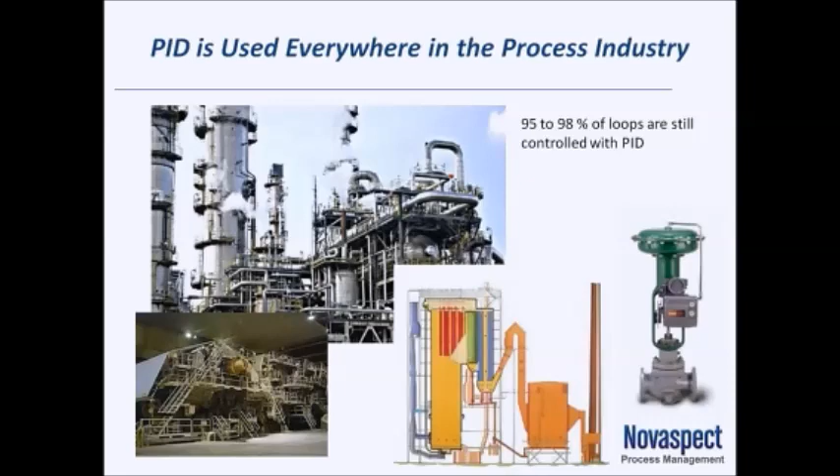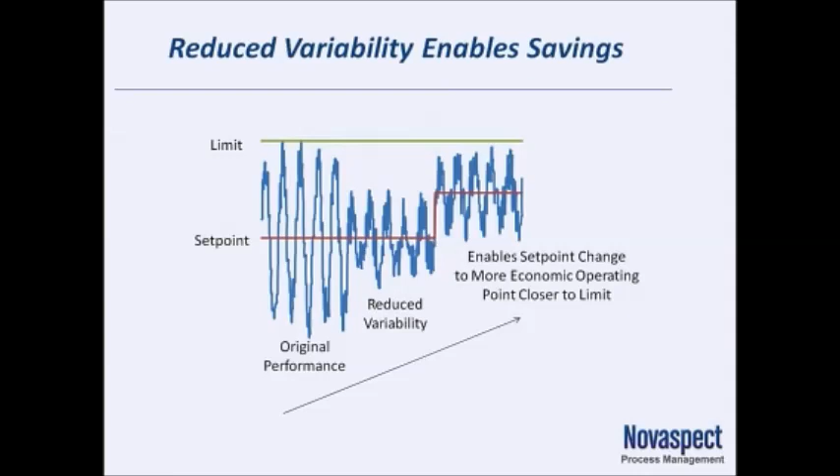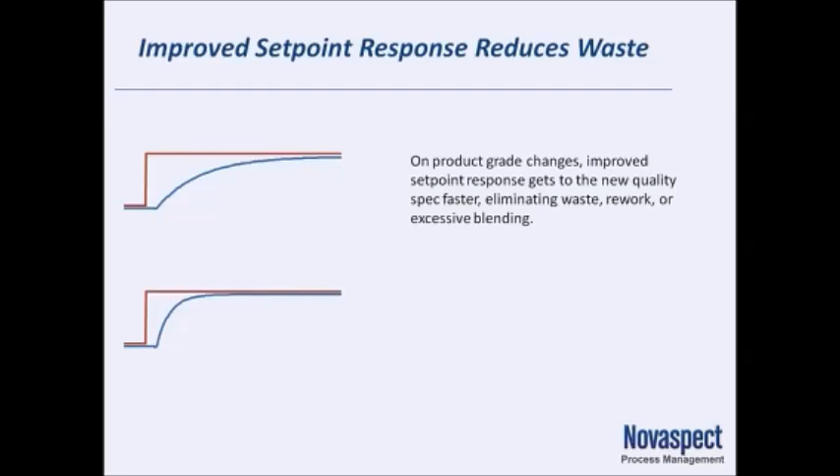Finally, perhaps the most important job of all for control loops is to respond to the unexpected or unmeasured. There are a lot of things that could change or go wrong in our plants. Most of them we don't anticipate. Many of them we don't even measure. The automatic controls are our first and best defense against those unplanned events.

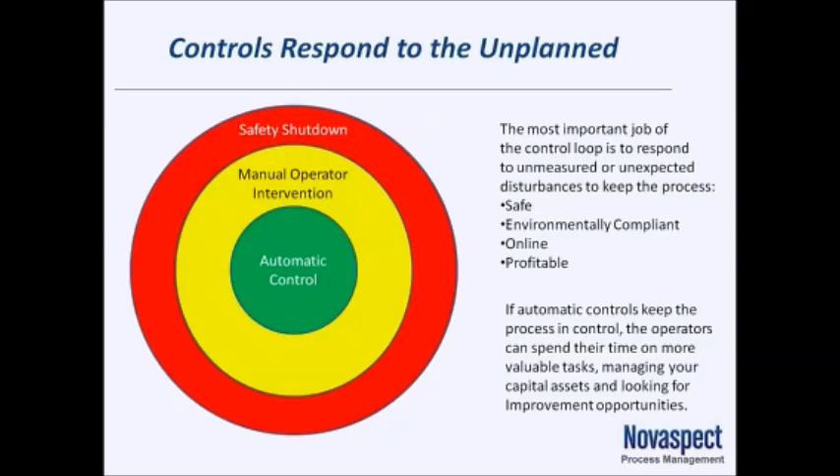So if the first layer of controls, our automatic controls, are effective, the operators can spend their time managing and optimizing your business rather than babysitting problem loops, and we stay online, safe, environmentally compliant, and profitable.

So the point of those previous three slides was to show that many of the outcomes of effective control translate into improved profitability. We stay safe, we comply with our regulatory requirements, we stay online more often, improved controls can reduce our maintenance cost and reduce our raw material costs. Best of all, it lets us make better product more often with less waste and less product giveaway. All of these improvements translate into dollars at the end of the day.

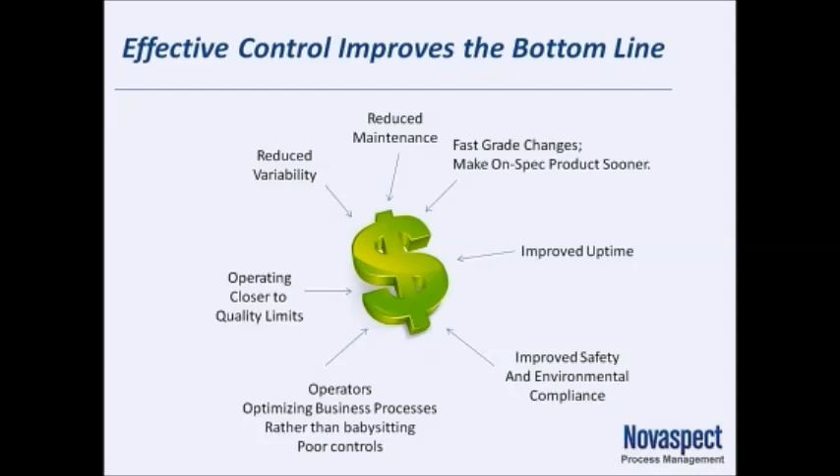But how well are we really doing? Those are our goals, that's what we're shooting for. As an industry, are we achieving those? Unfortunately, not very often.

There's a very often cited survey from EnTech from 1994. EnTech surveyed dozens of paper mills in Canada and found that of all the loops they analyzed, only 20% of them actually reduced variability. 80% of automatic control loops in our plants made problems worse rather than better. The EnTech team found that 30% of the loops were problematic due to valve problems - sticky valves, sloppy valves, valves that didn't go where the control system commanded them.

Another 30% of the loops actually made problems worse due to poor tuning. When there was variability or noise or disturbances in the process, these loops behaved worse in automatic control than they did in manual. Finally, the last 20% of the loops EnTech found were problematic due to a variety of configuration errors - that could have been measurement problems, improper scan rate, improper filtering, just configuration mistakes, or inappropriate control strategies.

There were other studies, and there continue to be other studies, that find similar results. Another 1993 study found that 30% of the loops they found in control rooms were left in manual, presumably because the operators felt more confident in manual than they did turning their loops over to automatic control. That same study found that 20% of the loops still used factory default tuning - in other words, they'd never been intentionally tuned before. Other studies more recently are finding similar results.

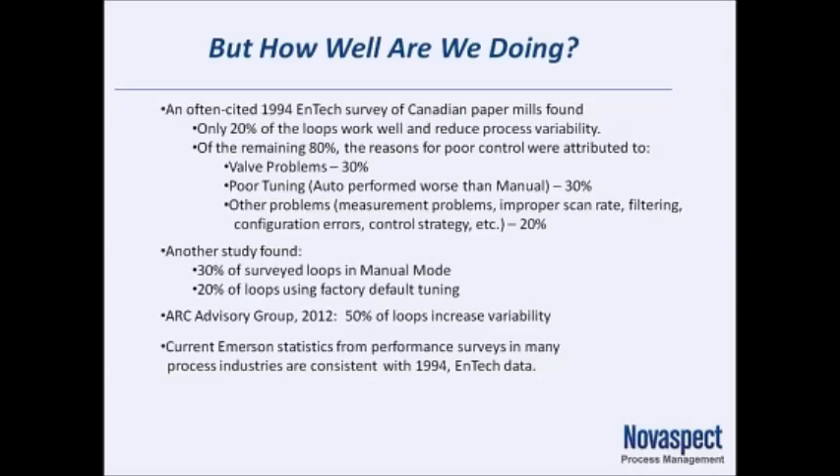So, I'm motivated to do better. I can see there's an opportunity. Where can I start? I started my search

So is there a simpler method? Yes, that's what I'd like to talk about today. The Lambda tuning method that I want to discuss gives us an opportunity to use one or two very simple rules. The method allows us to easily identify valve health.

If there's a mechanical problem, we recognize it early and have an opportunity to repair. The method results in predictable, stable behavior, smooth responses without overshoot. Most of all, I think the beauty of the Lambda method is it allows us to choose and prioritize our goals. We get to configure loops so they play nicely with others. That is, we can stop interactions by choosing which loops are most important to us, or we can choose to coordinate loops.

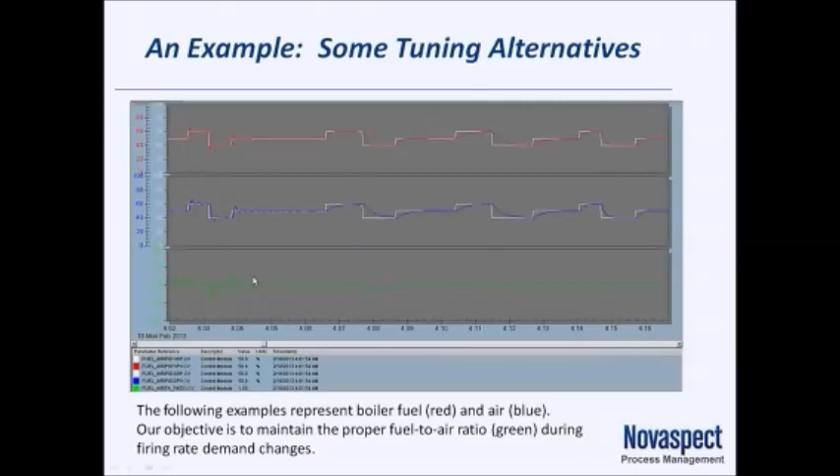First, let's look at some traditional techniques, including the one that's probably most familiar to many of us, the Ziegler-Nichols tuning rule.

A lot of people tune just by experience, by experimentation, or by feel. Some people can do well at this, a lot of us can't. Even when we do well, it's not repeatable and it's not teachable. It's hard to teach somebody that a gain of 0.6 just felt right to me for that loop. Even when we do it well for one loop, that method doesn't give us a clean way to coordinate loops to behave together to achieve any of our goals.

So, in the name of looking for a more objective standard, Ziegler-Nichols is the set of tuning rules that many of us fall back on - the set of tuning rules that many of us learned either in trade school or in engineering school.

Ziegler-Nichols was developed in the 1940s. It was first applied to actually aiming gun turrets on Navy ships, and its goal was simply to get to set point as fast as possible. So if you look at my trace here, when I changed my firing rate, fuel got to set point, or at least crossed over set point, within 2 seconds. Air got there in 3 seconds.

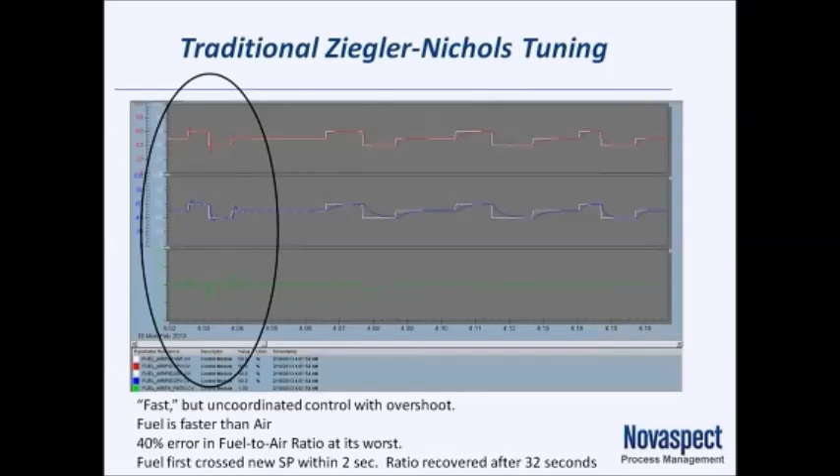We can do better. The next thing I want to discuss a little bit is an auto-tuner solution.

These are typical results from a modern control system auto-tuner. This is already worlds better. If your only other tool in your bag is Ziegler-Nichols, I'd highly recommend a much better alternative as an auto-tuner. You can see both fuel and air came to their new set point in a smooth fashion without overshoot. The problem is there's still not a convenient way to coordinate those two to play together, so we still had a 17% error right here in response to my load change. That's better than Ziegler-Nichols by a factor of 2, but we can do better.

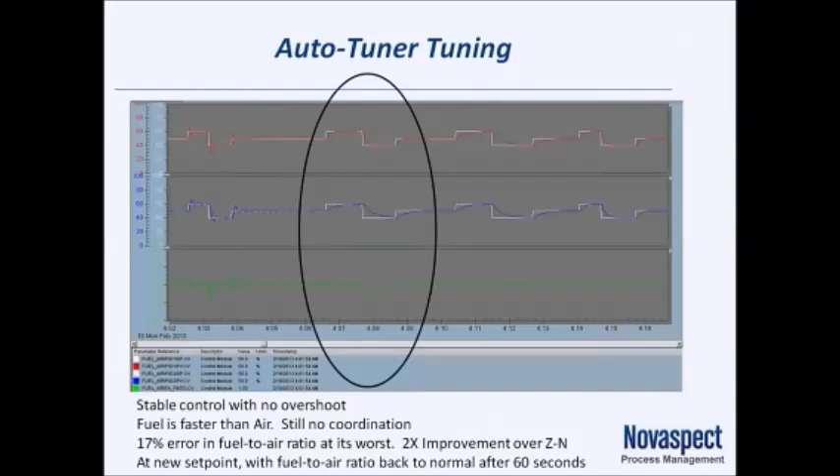Here I'm showing you for the first time today a conservatively tuned Lambda method tuning for fuel and air. The benefit of this method is I got to intentionally choose my response rate. Even though the dynamics of the two underlying loops are different - when I move a valve in manual, fuel gets to its new steady state faster than air does - in auto, I chose tuning so that fuel and air move together at the same rate as a coordinated pair. I came to set point 60 seconds after my change, but there was no error ever in fuel to air ratio. That is my important goal, and I was able to choose tuning constants that delivered.

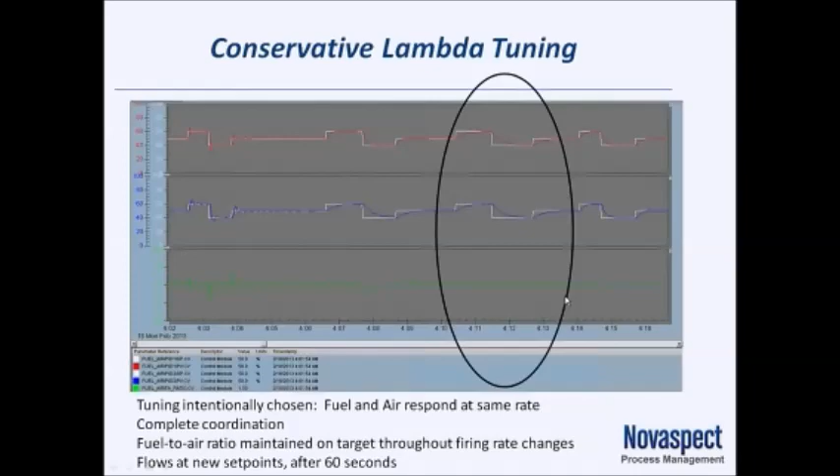Finally, my fourth example on this slide is another set of Lambda tuning, but this time I chose very fast, very aggressive tuning constants. What I want to show is that even though it's tuned fast, I still got stable control without overshoot. I actually got to target faster with Lambda tuning than I could with the so-called fast Ziegler-Nichols rules. With the aggressive tuning, I didn't see an error of any more than 2% in my fuel to air ratio, and I got to set point in 24 seconds.

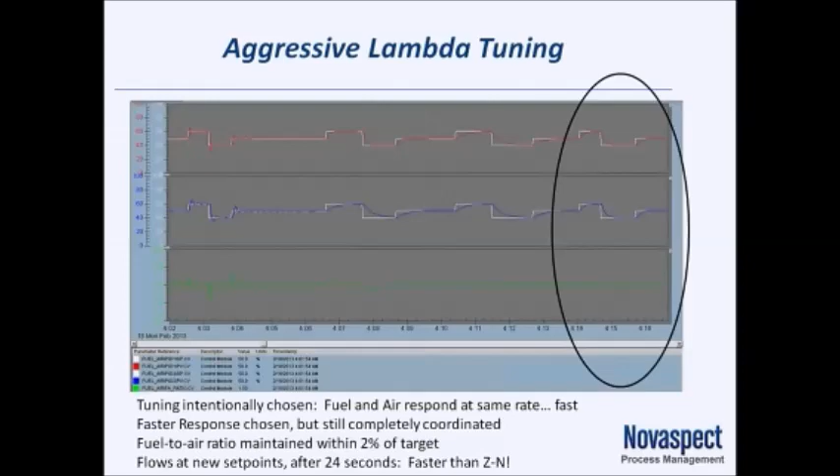So let's summarize some of the benefits that we just illustrated with those slides. I get to choose the response rates I want that meet my process needs. I don't just have to live with what my process or my valves give me.

Another benefit is I always have competing goals. I get to choose which of my goals are most important to me. In the previous example, maintaining the proper fuel to air ratio is much more important to me than simply saying I have fast control. I defined my goal and I achieved it.

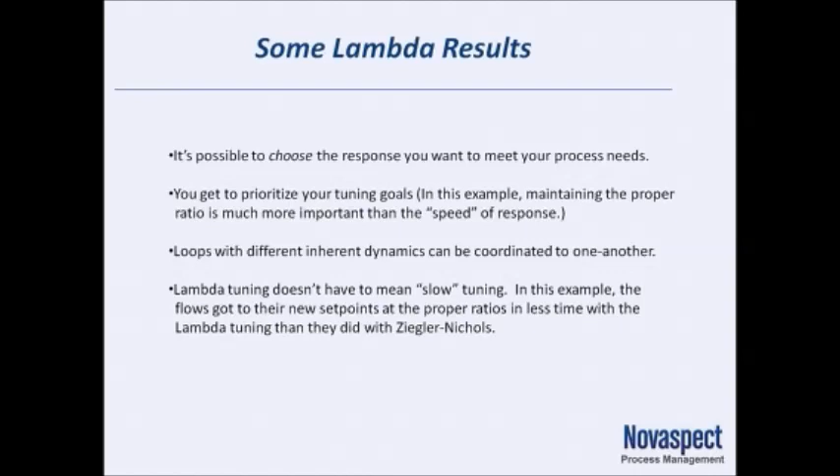The Lambda method gives us ways to coordinate loops that have inherently different dynamics. And the final slide was an example that Lambda tuning doesn't have to mean slow tuning. We got to set point with the proper ratios more quickly with the Lambda rules than we did with the standard old school fast rules.

These next couple slides are just a couple examples of real-world applications of Lambda tuning. The first one is a boiler steam drum. The top white straight line here is set point. We want the water level in the steam drum to be right in the middle of the drum. The yellow line is the actual drum level measurement. Red line is the steam flow, and the blue line in the bottom is the feed water.

Now, roughly speaking, what we're trying to do here is match the feed water flow in to the steam flow out. This light blue or cyan line is the valve position controlling the feed water, trying to achieve that goal. This was a steam drum, as found, tuned by others with fast, maybe not necessarily Ziegler-Nichols rules. This was just an attempt to tune the drum fast. At this instant, right here,

firing rate demand to this boiler picked up by 3%. And we saw the feed water overreact and underreact, overreact and underreact, to the point where it's actually affecting the steam flow out of this and affecting the other boilers that feed this same header. Probably the most important thing to look at here is that drum level is 4.5 inches above our target. At 5 inches above target, the safety system would shut this boiler off, and now it's not available to feed our plant anymore.

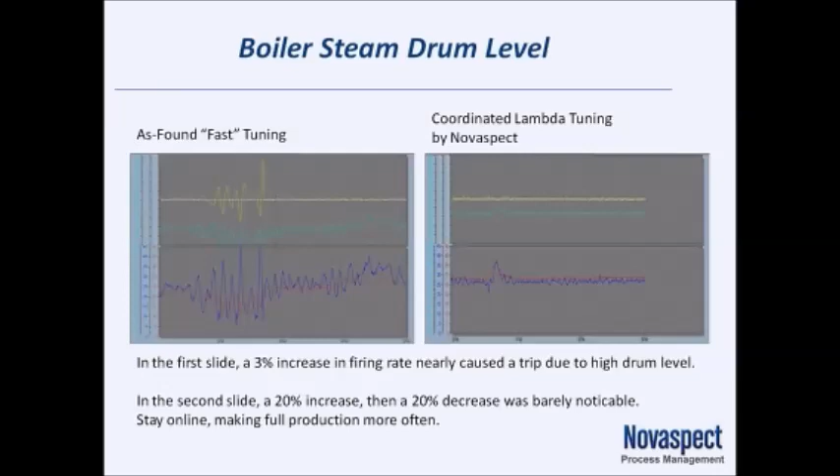This is another real-world example, a chemical manufacturer. This chemical reaction has two gaseous products, and there's a very expensive polymer membrane that separates the two. It's really important to maintain a near constant differential pressure across this membrane. As the differential pressure changes between the two product gases, it's flexing, fatiguing, and possibly even tearing this very expensive membrane.

My slide here is showing the before and after tuning. As found, this pressure between the two product gases was going up and down 1.5 inches higher or lower than set point. This was a simple preliminary tuning exercise that brought our control from plus or minus 1.5 inches to plus or minus 1/3 inch.

The bottom trace on each of these is another downstream user using one of these two product gases, and what I'm showing is that by fixing the problem at its source, we made control easier for the downstream user as well. Now, we came back to this customer site and took a broader look at the entire process and made some configuration changes in addition, which made this even better. Rather than showing you the final results, I wanted to show you these preliminary results, which were achieved with tuning only — just a handful of hours worth of work.

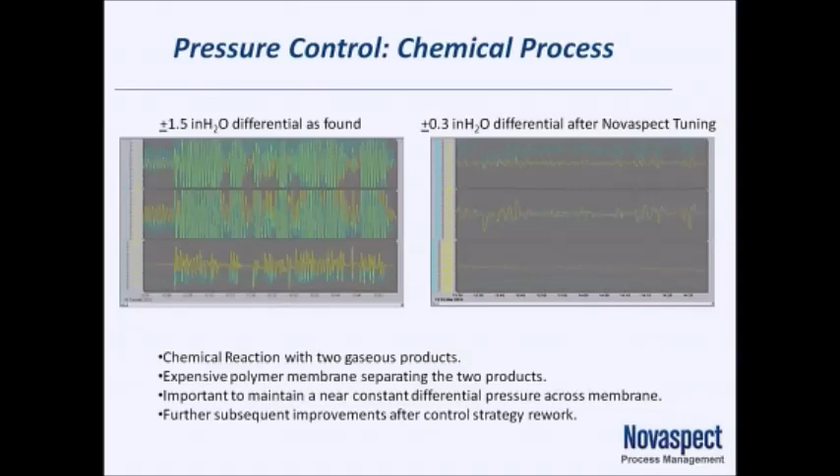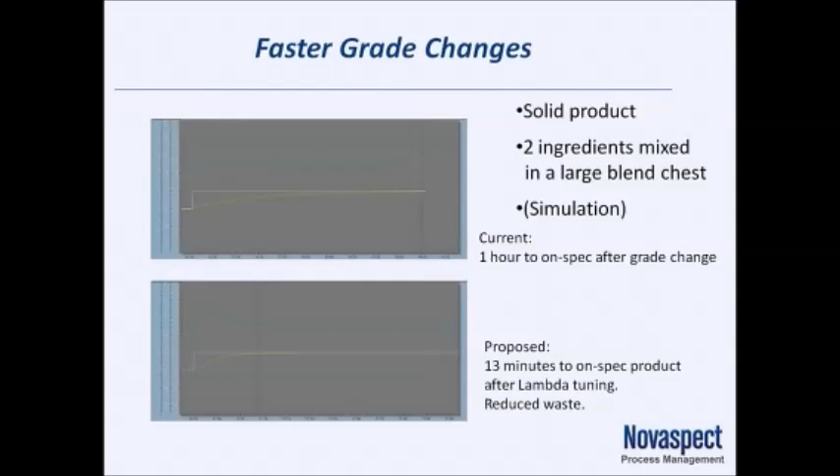We believe that by Lambda tuning this loop, we can bring that set point change time from an hour down to 13 minutes, reducing 47 minutes worth of giveaway. So after all the background and all the examples, we're finally ready to talk some mechanics of how we do this.

There's two kinds of processes I want to talk about today: self-regulating and integrating. The first one, the self-regulating process, is one where you change your controller output, you change your pump speed, you change your valve position. The process variable, or the important characteristic you're measuring and trying to control, will come to a new steady state. This is typical behavior for a flow loop, a temperature loop, and most pressures.

There's three things I care about when I'm trying to learn about the dynamics of this loop. The first one is, when I change my valve, how much does my process change? We call that process gain. Process gain is the change in percent measurement divided by the percent change in valve output.

The next thing I want to know is, how long does it take for that to change? We call that the time constant. I'll try to simplify this to results. The time constant is the time it takes to get 63% of the way from your initial value to your final value, but that's kind of cumbersome to measure. A good guideline is to look at how long it takes to get from your starting point until just about there. You can do that with your eyeball. Divide this total time to steady state by 4. Time to steady state divided by 4 is a very good, very useful, quick estimate of your time constant.

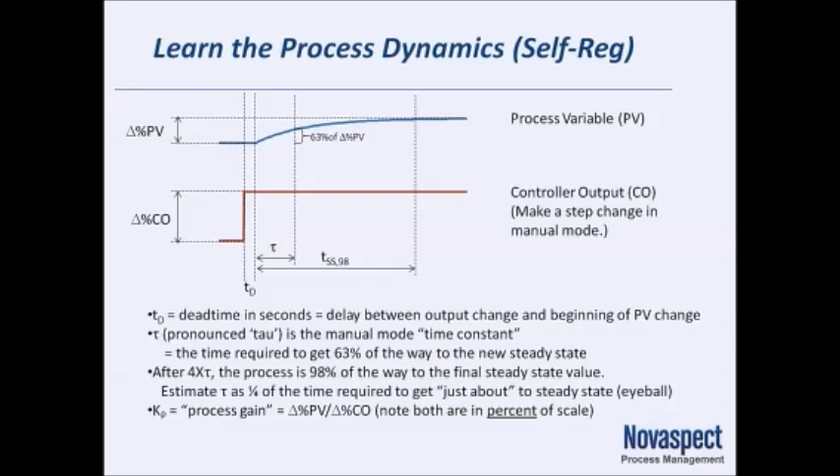With the Lambda method, I get to choose how fast I come to steady state. So again, if I want to come to steady state in 2 minutes, take that time to steady state divided by 4 - that is Lambda. So we have two time constants: Tau is the time constant in manual mode, and Lambda is the closed loop time constant, or the time constant in automatic mode. This is the number I get to choose. This defines how my tuning behaves, how my process works.

So the tuning rules: reset time in your PID controller is easy, it's the manual mode time constant. You're done - no calculation, plug in one measurement. The controller gain is a simple formula displayed in the last line of this slide. What I want to point out is this is a quick measurement and some quick math - it's addition, subtraction, multiplication, division. No calculus, no differential equations, no zero pole cancellation or Bode plots or any of the other methods you learned in trade school or college. All that high power math went into coming up with this formula, but the practical result at the end of the day is a quick test and quick arithmetic to get the results that we choose.

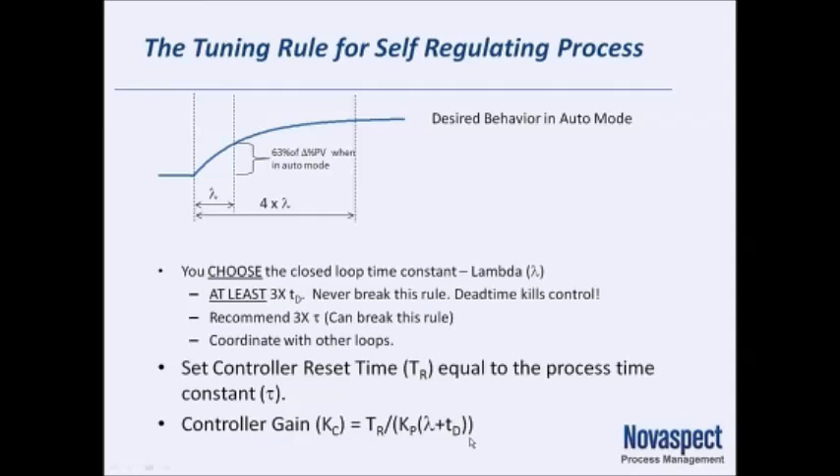I said there were two kinds of processes. The other one we call an integrating process. Integrating just means to successively add up. So the best example of an integrating process is a tank level. If we have more flow going into a tank than we have going out of a tank, we just keep adding that difference between input and output.

See my pointer here: as flow in increases, flow in is greater than flow out, and the process continues to increase at a constant slope. It doesn't come to a new steady state. Then I lower my valve position - now there's less flow going in than out, and my slope changes. So learning my process dynamics for an integrating process is a matter of how much does this slope change for a given output change.

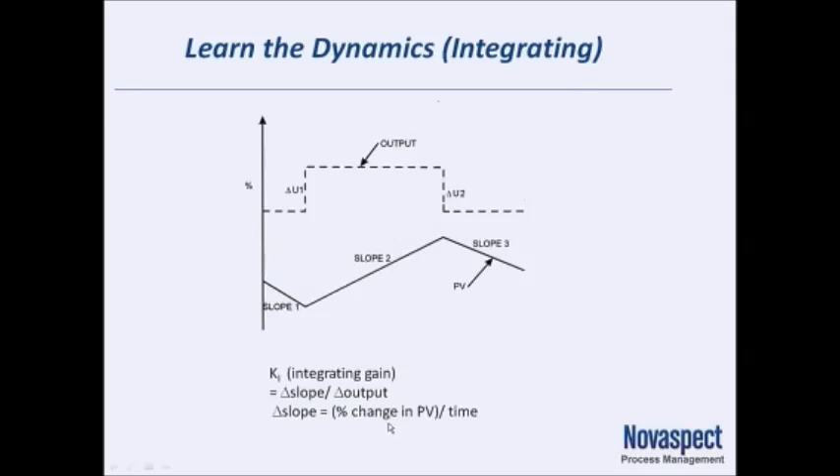We also have a lambda. We use that same term even for an integrating process, but in this case lambda represents: when I tune this loop and put it in automatic mode and some problem happens, how long does it take me to arrest that problem? How long before the problem stops getting worse?

So in this case, this f2 line represents flow out of a tank. Something else caused that to happen. I might not be able to control that or even know it's happening. But my lambda-tuned loop controlling flow into the tank, at 1 lambda time later, stops that level from getting any lower. Now I'm back on my path toward control to set point.

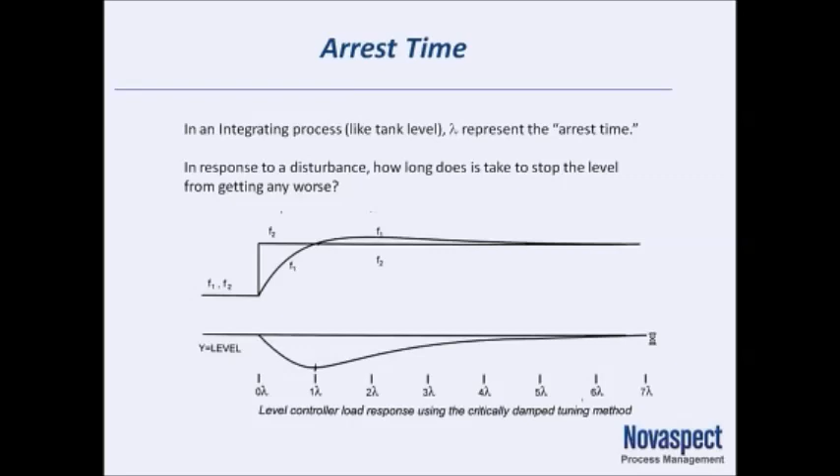Again, we have an arithmetic formula for integrating loops. My reset time isn't simply a matter of plugging in one number and you're done, but it's still a simple formula. My controller gain uses my integrating gain, change in slope divided by change in output, to come up with a simple arithmetic solution to achieve my tuning goal.

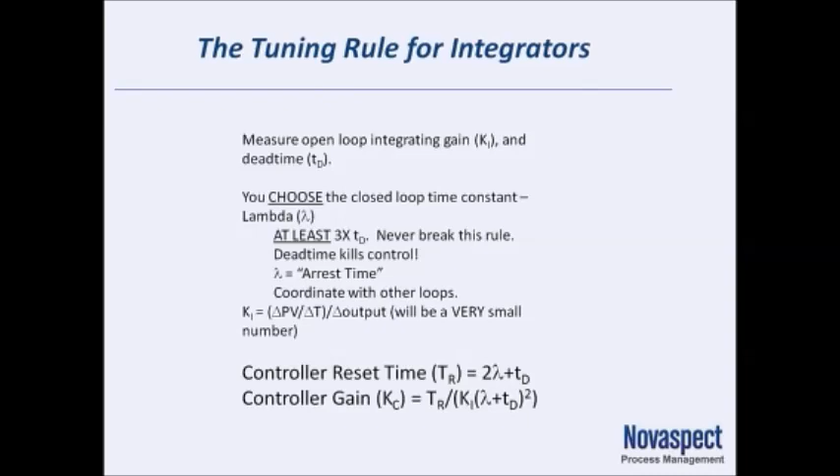To comment on our results: I went from a world with 648 different textbooks to meet 648 different special purpose tuning needs. I went from 100 tuning rules to 2 simple models with 2 simple formulas to achieve 99% of the goals we might run into in our plants. Life is very much simplified. I can tune with a purpose quickly and confidently.

Now, tuning is just a matter of judgment. I get to choose the lambda that meets my needs. And I admit, that's the catch.

This is one of my favorite quotes. I see it most often attributed to Will Rogers. He said, good judgment comes from experience. Experience comes from bad judgment. We all have the right to get better. We all have the right to learn from our mistakes, from our experiments, from the things that work well.

So how do we develop this good judgment to know how to choose the correct lambda time? Excuse me, I'm going to silence you one more time while I cough. Excuse me, please.

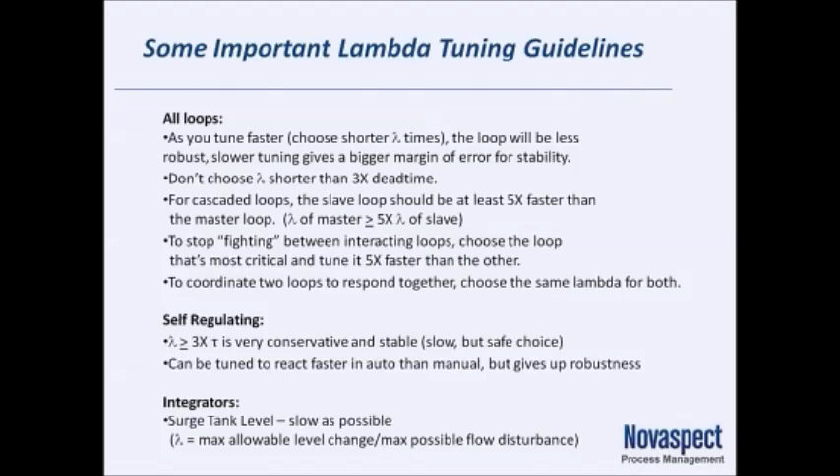Finally, I just want to make one comment about level tanks. A lot of times the goal of tuning a surge tank level is to be as slow as possible. If we choose our arrest time as the maximum allowable level change divided by the maximum possible flow disturbance, you divide a tank volume by a volumetric flow rate. I will accept a change as much as 1,000 gallons, and my maximum disturbance could be 100 gallons per minute. 1,000 gallons divided by 100 gallons a minute is 10 minutes. You can directly use that number as your surge tank arrest time, or Lambda.

Finally, I just want to close out here with another series of slides that are some examples of choosing Lambda methods and getting the results we expected. My loop in the next several examples is a loop that has 2 seconds of dead time, its time constant is 10 seconds, and its gain is 1. That is, for every 1% my valve position changes, my flow also changes by 1%. I'm comparing 2 different tuning sets, both of them Lambda.

The left half of each of the subsequent slides is a Lambda time of 30 seconds, or that rule of thumb I told you before, three times the manual mode time constant. Example number 2 is always more aggressive tuning. Lambda time of 6 seconds. This is very aggressive, and it's actually faster response in auto mode than we were capable of achieving in manual.

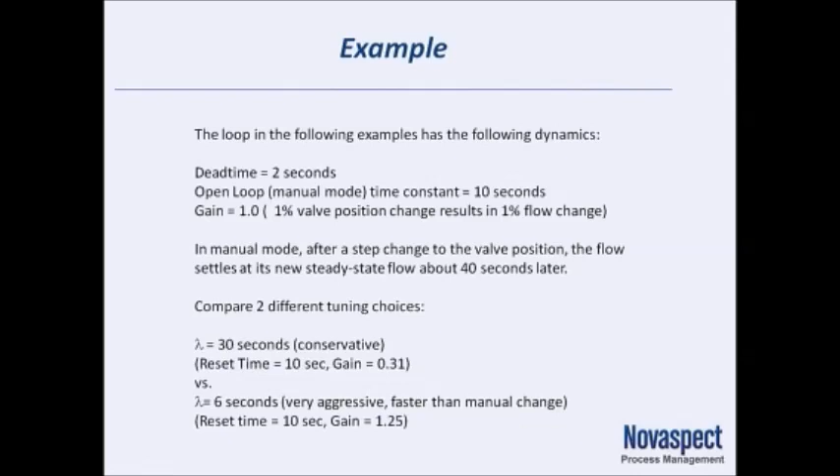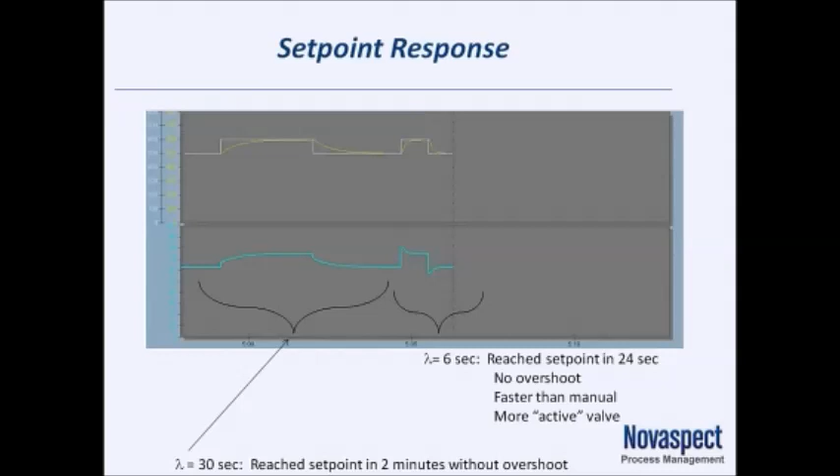First comparison is set point response. When my Lambda time is 30 seconds, 4 times Lambda is my time to steady state, I got to my new set point in 2 minutes, exactly as predicted. No overshoot. Change to the more aggressive tuning on the right half of the slide. Again, got to set point in 24 seconds, exactly as planned, exactly as predicted. No overshoot, it's stable. What we are seeing, though, is the valve is more active. That might have an implication on valve maintenance. More frictional wear on the valve stem might cause more maintenance later. But if that's important to us to achieve fast control, predictably, we can do it.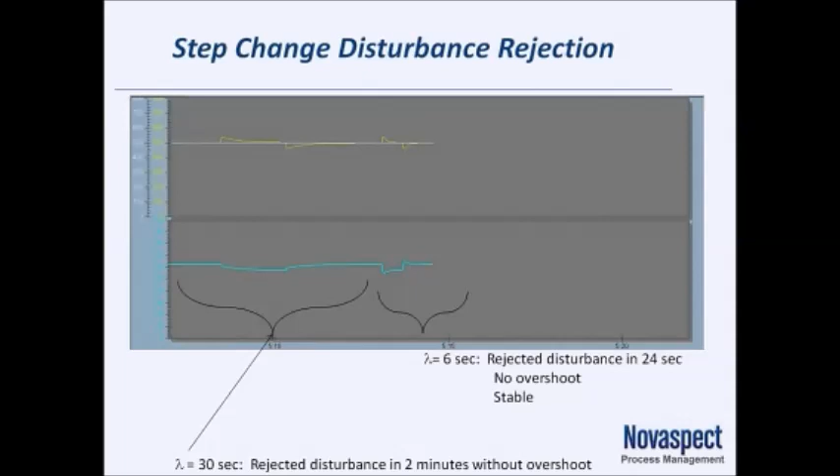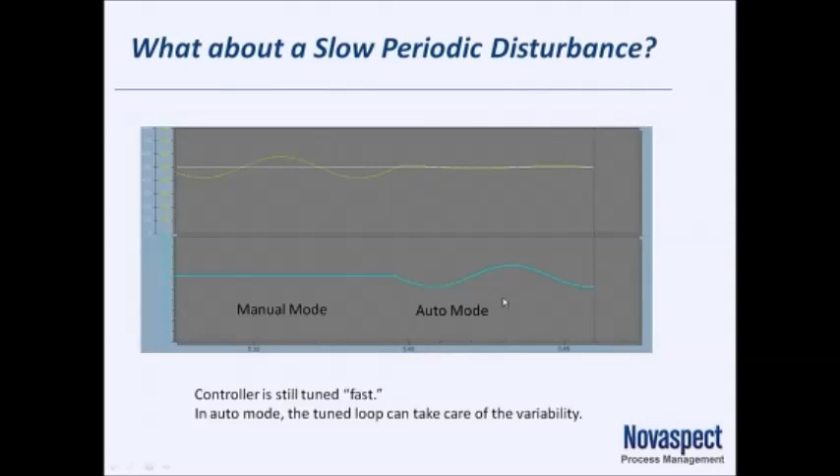So what could go wrong? Everything I've shown you so far demonstrates loops behaving as intended, as planned. Even with the aggressive tuning, everything's been smooth and predictable. What could go wrong?

And more often than not, what goes wrong is mechanically your valve or your VFD is in rough shape. This slide here is a typical response of what a sticky valve looks like. So—

Excuse me, please. Sorry about that, I think I forgot to unmute you. I'm back. Thank you, Jamie.

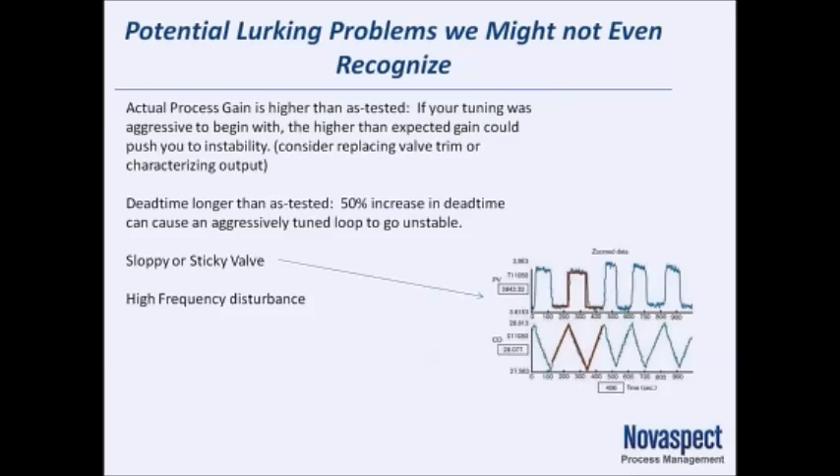And the last 'what could go wrong' slide I want to show you today is: what if instead of the slow periodic disturbance, we have a high frequency or fast disturbance? Here we show a valve in manual, and with the valve in manual there's something else happening upstream that's causing my flow to go up and down, up and down, once every 12 seconds. What's important here with my aggressively tuned lambda model is when I put it in auto, the peak-to-peak size of this noise actually got 30% worse.

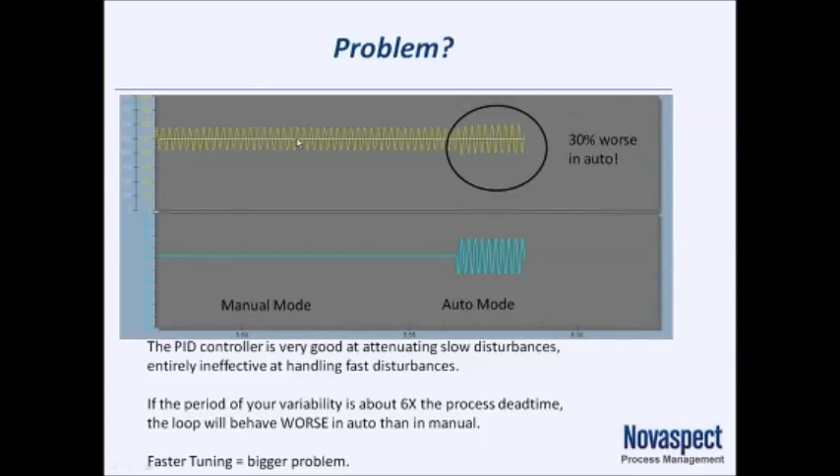A hint to where that source is the frequency of that problem. I'm going to go back 2 slides here. This oscillation that happened in manual, peak to peak every 12 seconds, when you find its true source that needs to be fixed, it will also be peak to peak every 12 seconds.

Sometimes we can take advantage of process design remedies, like adding a surge tank. Often that's too little, too late from our perspective as tuning engineers. We don't have that opportunity.

And finally, my point about conservatively chosen lambda times. If we've exhausted all other possibilities and can't fix the problem somewhere else, tune lambda conservatively so we don't magnify the problem.

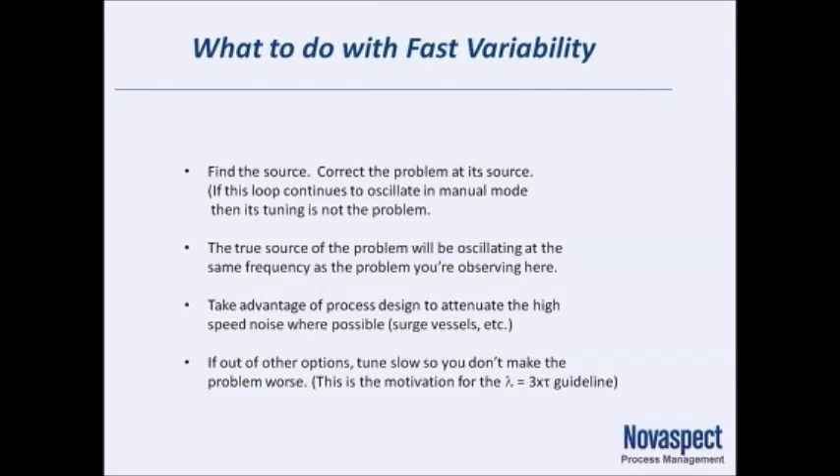Just want to finish today with one more brief case study. This is a very generic drawing of a cryogenic air separation plant. Very, very interactive. This distillation column on the left side is actually two distillation columns stacked on top of one another.

The condenser of the high pressure column is the reboiler of the low pressure column. We've got a side stream coming off the low pressure column going off to this crude argon purifying column. Now there's a variety of different configurations for air separation units that depend on the specifics of how the argon is purified, depends on whether these oxygen and nitrogen products are gaseous or liquid. But in all of them, this is an extremely interactive, extremely difficult tuning job.

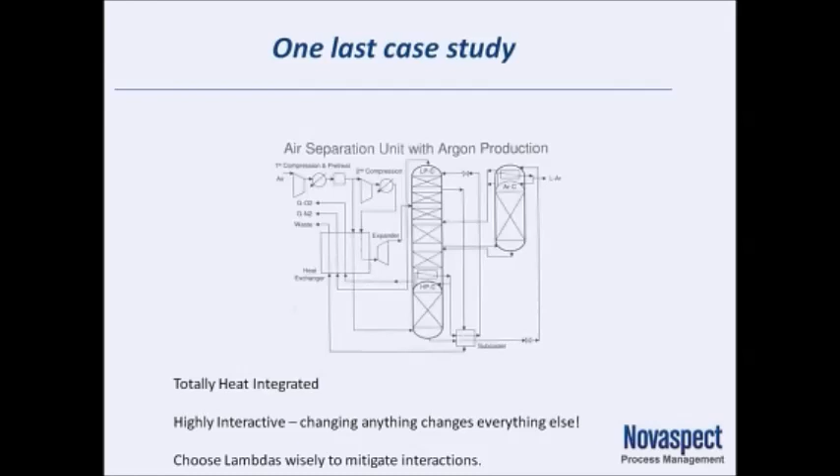I just wanted to show one slide of a before and after. This is an as-found air separation unit. This is the same unit tuned with the Lambda method. We've gone from big and scribbly to straight lines.

Perhaps the most important line I want to show you here is this dark blue. This is the oxygen composition going to the argon column. At about 89%, this particular unit would have tripped offline. We got down to 89.5. After tuning, instead of having a 5% variability here, we had about a 0.5% variability here.

From here on, this is an intentional operator set point change to test something else. This was an improvement of a factor of 10 over the as-found tuning, simply by using that judgment and choosing our lambda times for the various loops well.

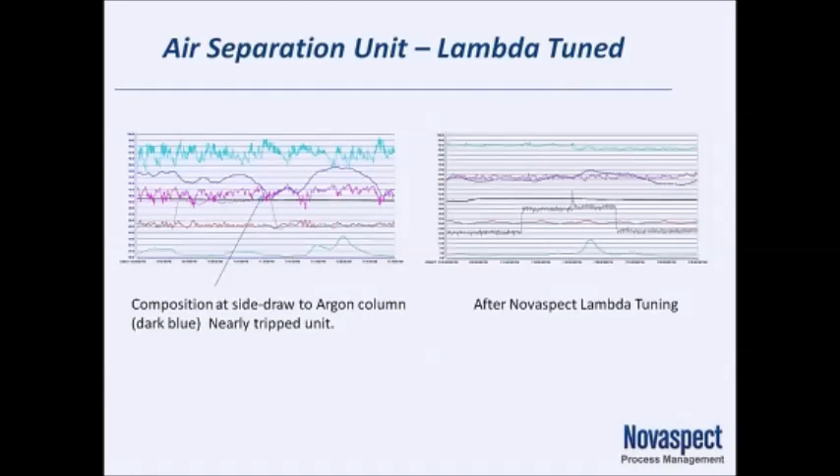So to summarize all the things that we talked about today, I hope I've made an impression that the lambda tuning method is a simple method that allows you to achieve stable, robust control without overshoot that responds at the speed you choose.

The math is simple. It can be implemented quickly and with confidence, and it gives us an objective way to choose our goals and achieve them, whether those goals are choosing something like maintaining fuel-to-air ratio is more important to me than quick set point response.

It gives me the ability to decouple interacting loops or to intentionally couple loops that I want to behave together. It gives me the ability during my bump testing phase to see mechanical problems, identify them and fix them at their source.

And finally, it's actually my second to last bullet there. When we are uncertain, when there are things we don't know, we can always back off and be conservative. If there's a risk of high frequency disturbances elsewhere, we can choose slow lambda times that don't magnify our problems.

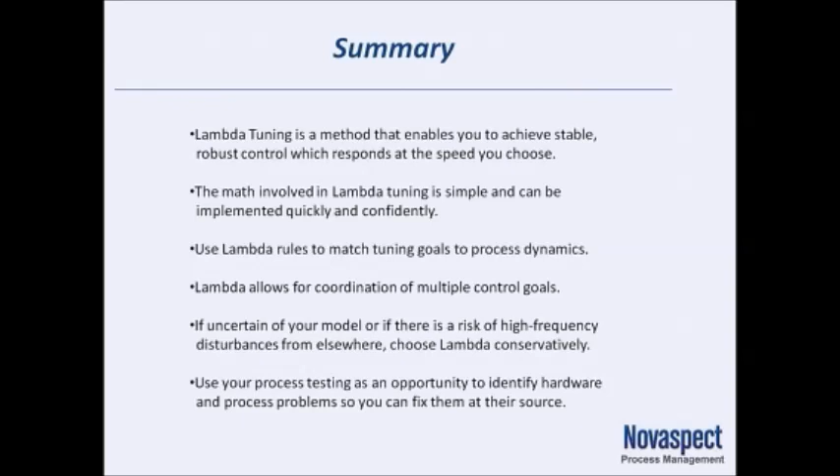So we've scheduled a session 2 of this talk. Thursday, April 11th, I want to talk about the use of process design to improve control up front, but mostly I want to talk about a set of instances. When can we safely choose some very, very aggressive lambda tuning? When is that safe? When is that prudent? In that line, I'm going to talk about something we call the near integrator model. And the April 11th presentation is going to be much less talking, much more dedicated towards demonstrations and examples.